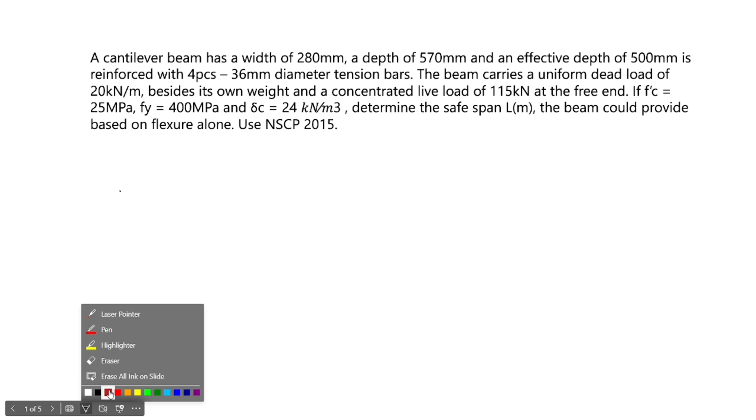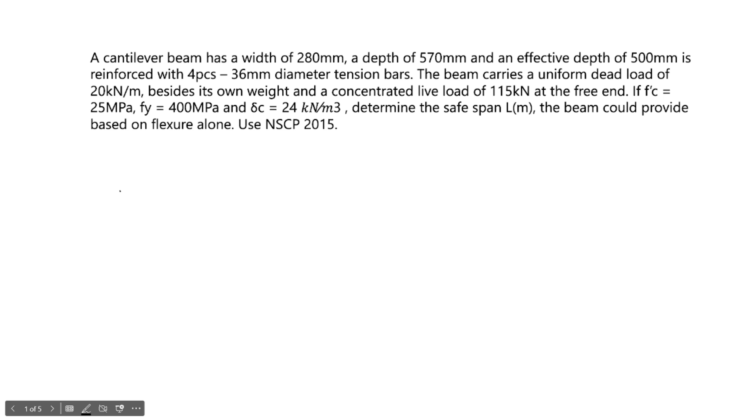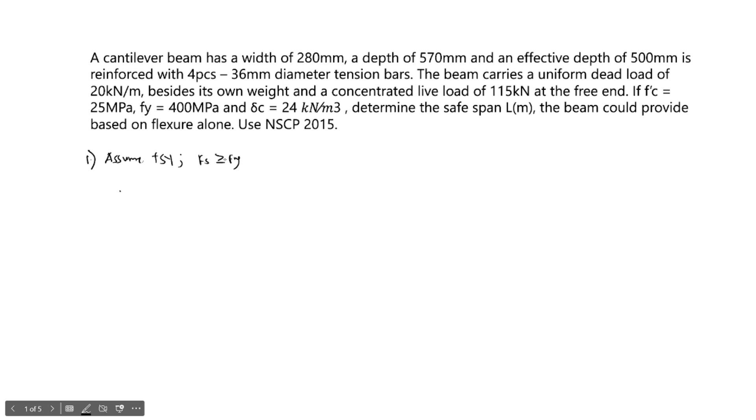Unang step, mag-a-assume pa rin tayo na tension steel will yield, where yung Fs mo should be greater than or equal to yield stress, which is 400. Okay. With that, masasolve natin yung values ng A and C. So, for A and C, may formula tayo for A. A is equals to As Fy over 0.85 f'c b.

As natin, nag-iba tayo, naging 36 mm diameter na. Pi over 4 times 36 squared times 4, apat yan, times Fy 400. 0.85, yung f'c natin is 25. b, yung 280 yung width. Yung height ng stress block now is 273.71 mm. So, kapag nakuha mo na A, kunin mo na rin yung C. C is equals A over beta 1.

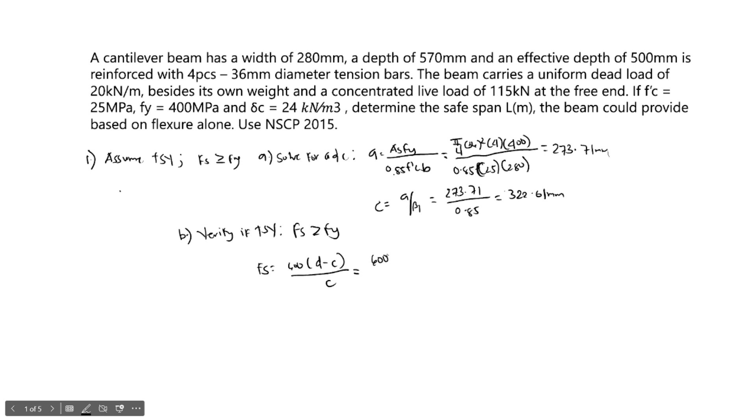Next step, since may A and C ka na, verify natin kung tama ba yung assumption mo na tension steel will yield, where Fs dapat mas malaki siya sa Fy. Fs natin is equal to 600 multiplied by d minus C over C. 600, d effective depth natin is 500 minus C,

yung nakuha na C is 322.01 over 322.01. And yung Fs natin is 331.65, which is less than siya kumpara sa Fy natin na 400 MPa. So therefore, tension steel does not yield.

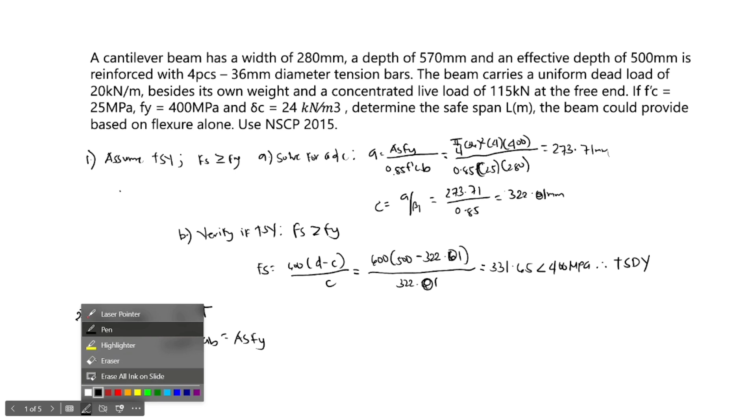0.85 f'c a b is equals to As Fs. Fs natin is 600 multiplied by d minus C over C. And kita natin na dalawa yung magiging unknown natin, yung a tsaka yung C. Eh yung a pwede natin i-express siya in terms of C. Diba a is equals to beta 1 C. Therefore, C is equals to a over beta 1.

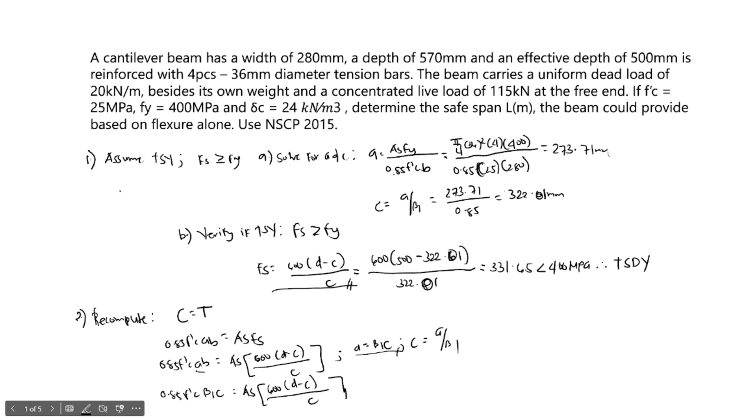So, 0.85 f'c and a natin, beta 1 C, is equals to As times 600 multiplied by d minus C over C. So, by that, pwede na natin i-substitute yung mga given values dito. Yung beta 1 na gagamitin natin is 0.85 since yung f'c is less than 28 MPa. Compute na tayo.

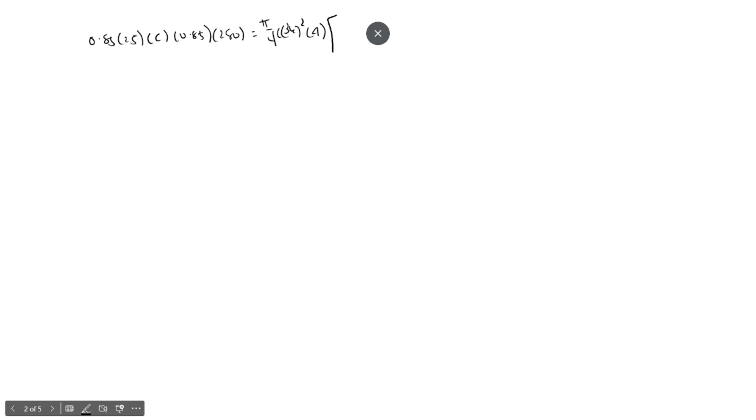0.85 times 25 yung f'c natin times yung C times yung beta 1 is 0.85, and then yung width 280, is equals to As. As natin is pi over 4 times 36 squared and apat sila. And then yung Fs na 600 times 500 minus C over C. And by shift solve, makukuha natin yung value ng C. Therefore, C natin is 306.06 mm. And pag nakuha mo na yung C, kunin mo na yung a.

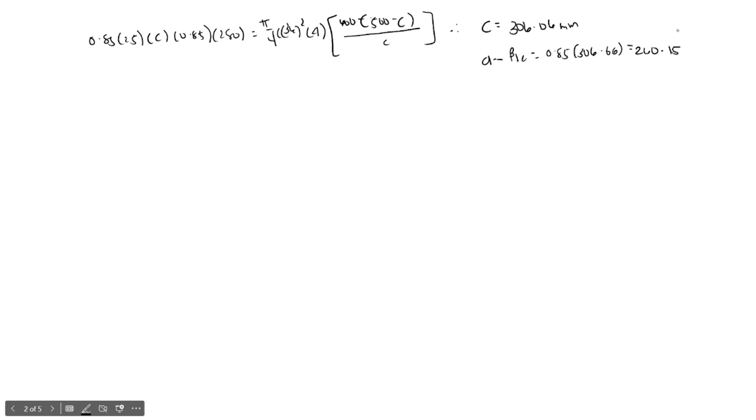a is equals to beta 1 C, di ba? So, 0.85 times 306.06 equals to 260.15. Okay. And verify ulit natin kung tension steel does not yield talaga by these new values of a and C. Kapag tension steel does not yield, yung Fs mo dapat less than siya sa Fy.

So, Fs equals to 600 times d minus C over C equals to 600 times effective depth 500 minus yung new value ng C mo, 306.06, over 306.06. Fs mo nun is equals to 380.2, which is less than Fy. Yung Fy mo is 400 MPa. So, therefore, tension steel does not yield talaga.

And also, under din siya ng compression control. Since yung Fs mo, 380.2, less than Fy, and ayon doon sa NSCP 2015, yung reduction factor mo nun is 0.65 and under siya ng compression control.

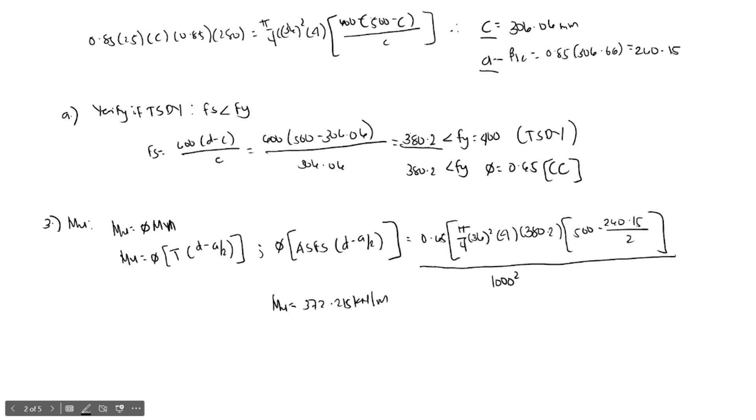kilonewton-meter. And then, next step natin is titignan natin siya in flexure. Safe in flexure if yung Mu capacity mo, yung ultimate moment na nakuha mo based sa mga formulas, must be greater than or equal to Mu max, yung actual moment by the given loads sa problem. So, kunin muna natin yung M max gaya nung previous problem. Load combination 1.2 w dead load times L squared over 2. Since cantilever to, ganyan yung shortcut formula.

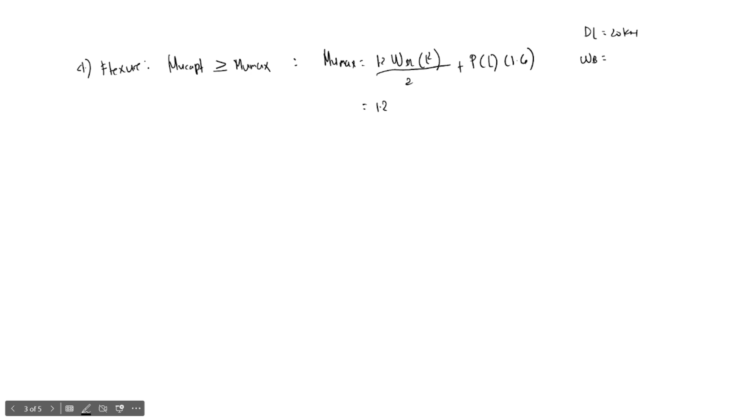Plus yung concentrated live load, 1.6 PL, for the load combination. So, 1.2 w ng dead load natin. Meron tayong given dead load, 20 kilonewton. Besides that, kunin natin yung self-weight ng beam natin. Area ng beam, 0.57 times 0.28, times yung unit weight, 24, is equals to 3.83. Parehong dead load tong dalawang to. So, yung w dead load natin is equals to 23.83.

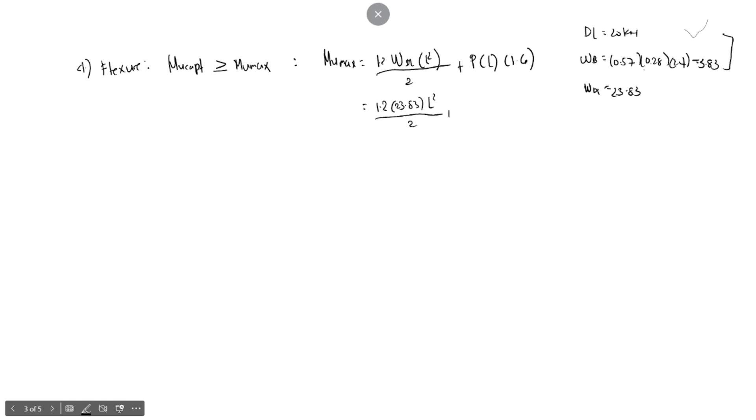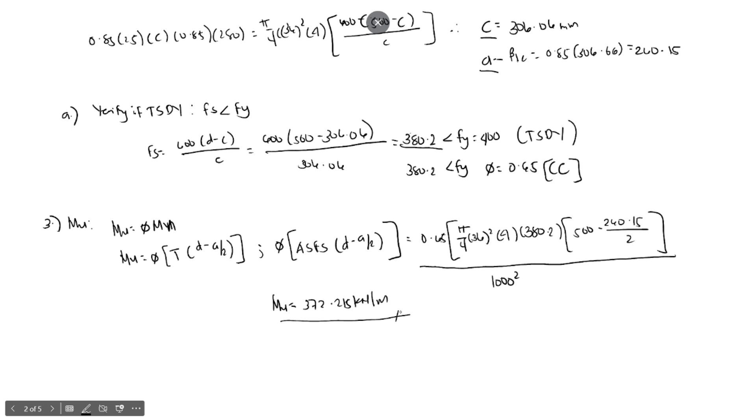23.83 L squared over 2. Yung 1.6 P natin is 115, times L. Simplify pa natin: 14.298 L squared plus 184 L. And by that, pwede natin siyang i-equate dito. Since yung Mu capacity natin, Mu ultimate, 372.215, is equals to Mu max, 14.298 L squared plus 184 L.

Quadratic yan, dalawa rin yung makukuha natin: 1.777 meter and -14.646 meter. This is for the positive root and negative root. And mas acceptable ito since positive yan. So, therefore, yung length natin is equals to 1.777 meter. Ito yung safe span under the given loads natin sa problem.